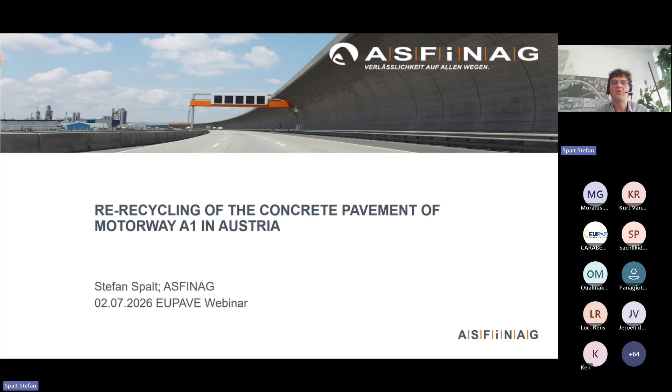Welcome from Austria to my presentation, the re-recycling of the concrete pavement of a motorway in Austria. First, I'd like to explain Asfinag, the company where I work. Asfinag is a state-owned company for operating, building and maintaining all motorways in Austria. The financing of Asfinag is 100% by toll, and in 2024 the toll amount was about 2.5 billion euro. In Austria all kinds of vehicles have to pay toll.

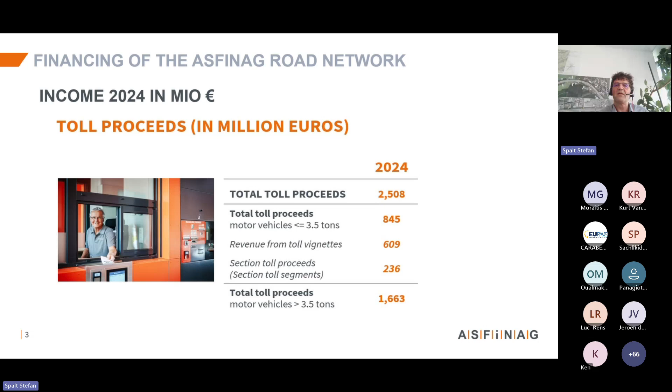That means, in the length of the road network, about 1.1 million euro per kilometer. In Germany, for example, in 2025, it was 1 million euro. What do we do with the money? We have a big construction program. The largest amount is for the renovation of roads. A little bit smaller are new roads and new lanes, the blue ones. And the smaller part is investment, meaning investments for lorries or for buildings.

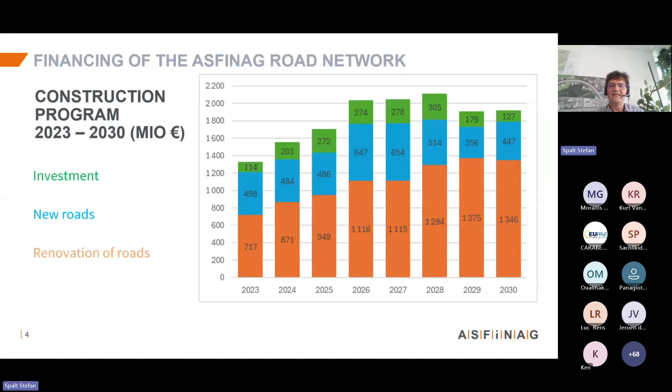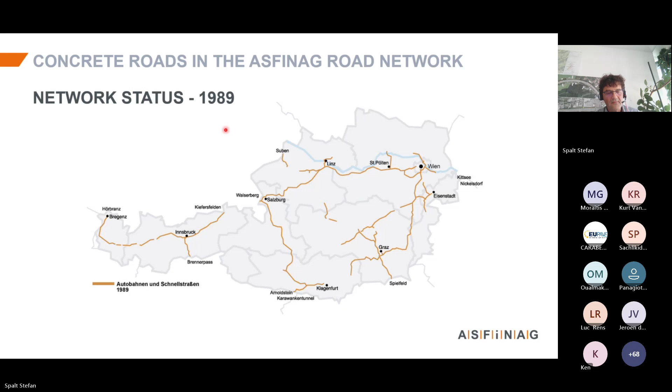And now we come to the network status 2024. Here you see Austria. The interesting thing for me: all roads built in the 50s and 60s were concrete roads. The gray ones are the concrete roads. These are different tunnels, because in Austria all tunnels longer than 1 kilometer have to be built with a concrete road. And here is a special one: we have one PPP project, S1, that's also a concrete road.

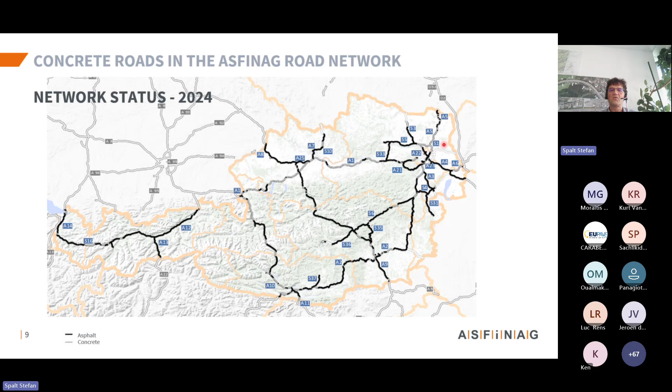For the renovation, you need about 400,000 cubic meters of concrete, or about 150,000 tons of cement. As I told you, in Austria we have 1/3 concrete roads, 2/3 asphalt roads. In Germany, for example, 25% of the total network is concrete roads.

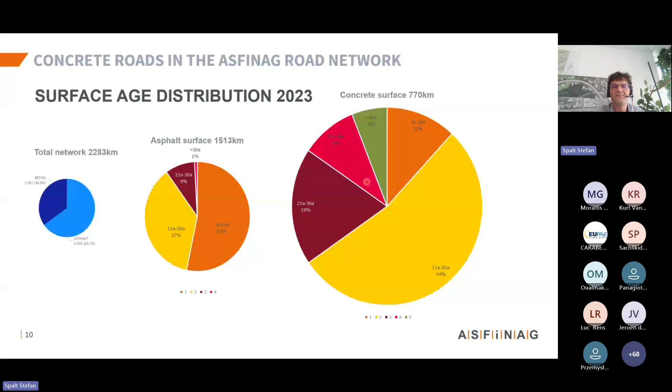Now we come to the first renovation cycle. The first renovation cycle started in 1990 in Salzburg. Why Salzburg? Because the construction in 1955 also started in Salzburg, so we had the oldest motorway there. The idea of recycling in 1990 was an idea by a company, and it was quite successful. Later this idea became the standard renovation of motorways. Also in 1990 at the same site, they made the first exposed aggregate concrete, and that's also the standard in Austria since 1990.

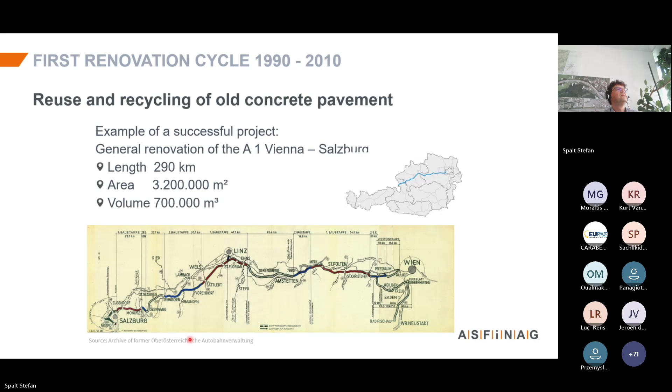So what was the motivation in the 90s for recycling? First one was to conserve natural resources, limited landfill space, and transport distances. And that is possible: you need the presence of homogeneous starting materials with properties proven over many years. Yeah, we know our concrete roads and we have the experience. But now I come to the most important thing, the economical, because in the 90s you could save about 10% of the money.

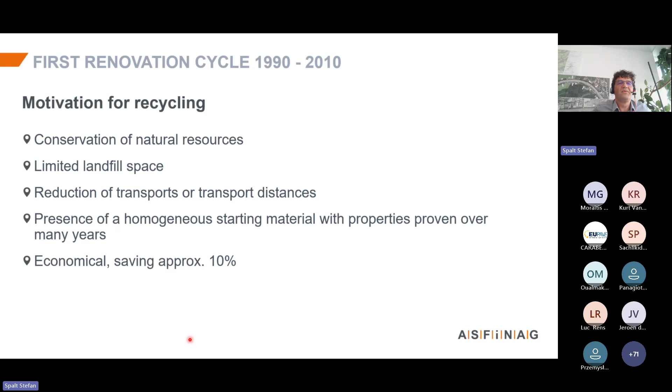Here we see a recycling area. The pictures are from 1996. At the left you see the two parts for the concrete production, one part for the top layer, one part for the recycling layer. And here on the right, there is the crushing plant. And you see this area is directly at the construction site.

So you have short transportation, and short transportation is important because for a good project, for good concrete roads, you have to bring the concrete just in time. If in the morning the machine is starting, the machine should only stop once a day in the evening.

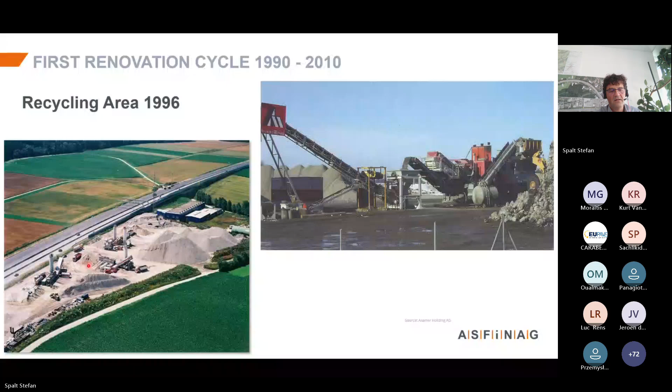On this picture you see how it was possible to recycle 100%. That's the old road. Actually, in the last years, they put a thin asphalt layer on top. Then all concrete parts: 70% was material 4 to 32, used in the recycling layer, and 30% was material 0-4 for the cement stabilization.

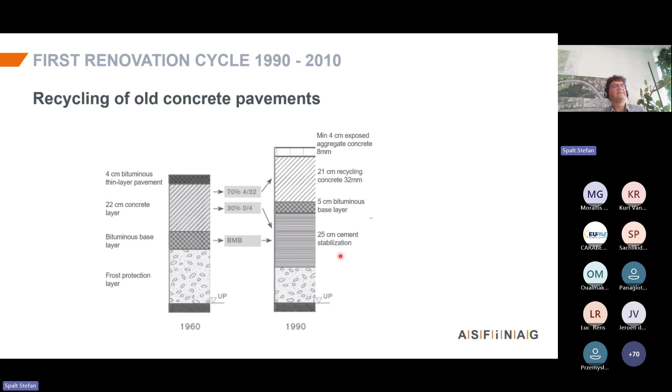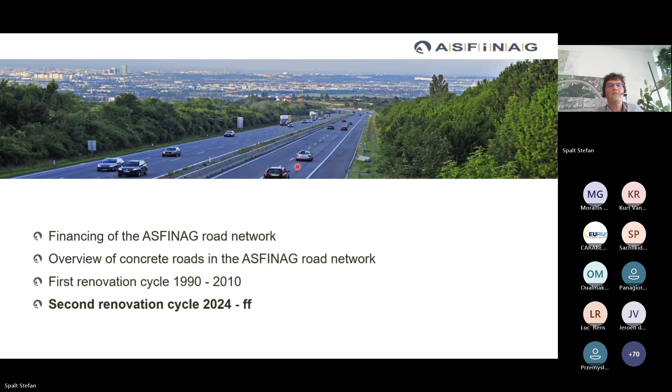Now we come to the second renovation cycle. What do you need for the second renovation cycle? The most important thing is you need a recycled roadway, of course. Without a recycled roadway, you can't re-recycle. And then you have to check the materials. The important thing is the preliminary investigation of ASR, the alkali-silica reaction. We checked in advance and it was okay.

And then in advance, we hired the land directly on the construction site and gave it to the construction company, and in this time we also checked in advance the official approval procedure. In our case, we didn't say you have to recycle, but it was possible to recycle because we hired this area in advance. And the company who won said he'd like to recycle. So we started the recycling process, they checked the recipe, and then we were working together.

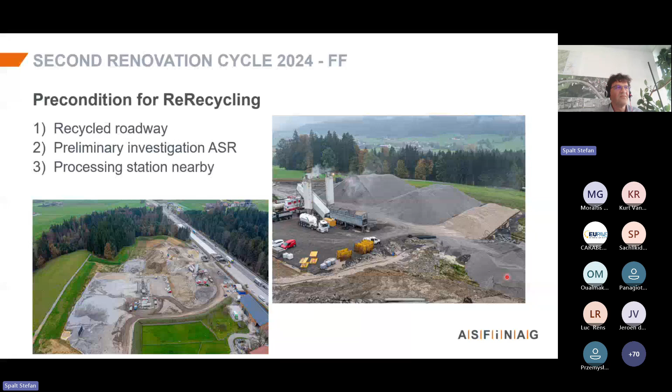So now let's see the EU taxonomy regulation. There are 5 points, and we checked together whether it is possible to reach these 5 points. The first point: you have to recycle all materials unless they're contaminated. That was very easy because that's daily business. Nobody would waste good materials. The second point, not so easy.

At least 50% of the new structural road elements must consist of reused or recycled materials or non-dangerous industrial byproducts. That means a part of the cement is a non-dangerous industrial byproduct. I'll explain later how we reached this by the recipe.

Then there is a limit on transport distance. That was no problem for us because the recycling area was directly at the site, as you saw. The new lifespan of the binder layer should be over 20 years for concrete roads. It's no problem because in Austria, concrete roads are designed for at least 30 years.

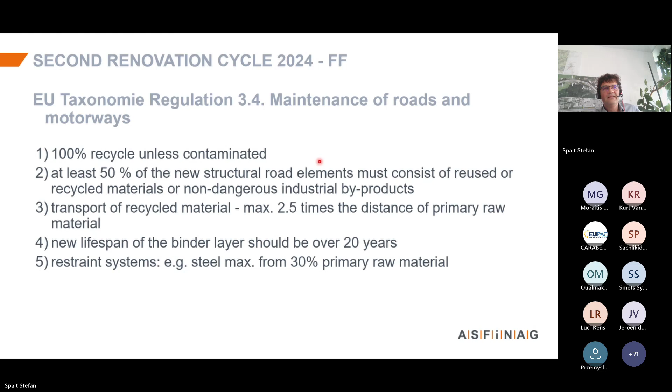Now we come to the recipe. The recycling is this part, the yellow part. And you see on the left the average of all recyclings on the A1 Westautobahn between 1991 and 2010. There we had a recycling rate of about 60%. In the first recycling at Mondsee Talgau, we had a rate of 55%.

And then, to design the recipe and say we'd like to reach the EU taxonomy, we know we need at least 70%. And now you say, oh, 70%, that's much more than 50%. Yes, but 50% means the top layer and the bottom layer, and you can only recycle the bottom layer. So the top layer is always new material.

And what did we change? You see the material 0/4. Only a part of the material 0/4 is for recycling. It's possible in Austria to recycle this material also. We asked the company, can you do it, can you manage, because it's very hard to get a smart mixture of concrete if you use these materials. And the company who mixed the concrete has more than 30 years of experience recycling concrete, and said, yes, we do it. We can manage.

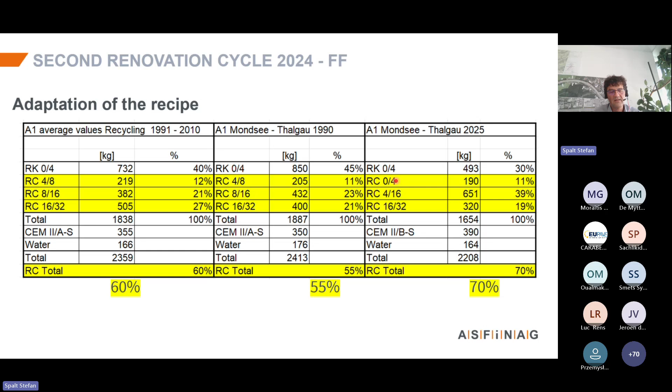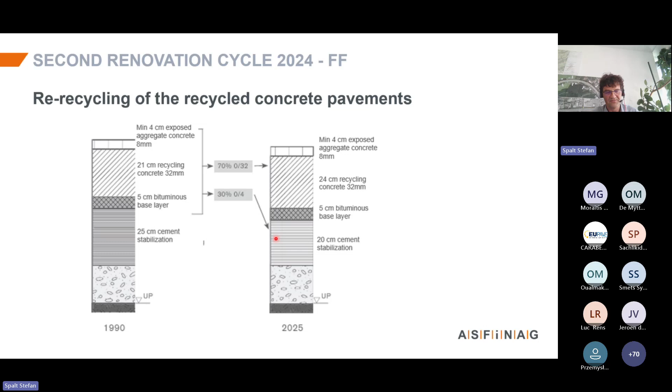Now, the conclusions. We are really proud of the first successful re-recycling. And I think that should be a blueprint for further renewals of concrete motorways in Austria, because now we have renovated 7.5 kilometers, but 280 kilometers are still missing. We showed that it is possible to build a motorway according to the EU taxonomy.

And I think the most important thing is number 3. There are the costs. We could save again about 10% of money for the concrete. And for the future, I think re-re-recycling should be possible. Yeah, that should be possible.

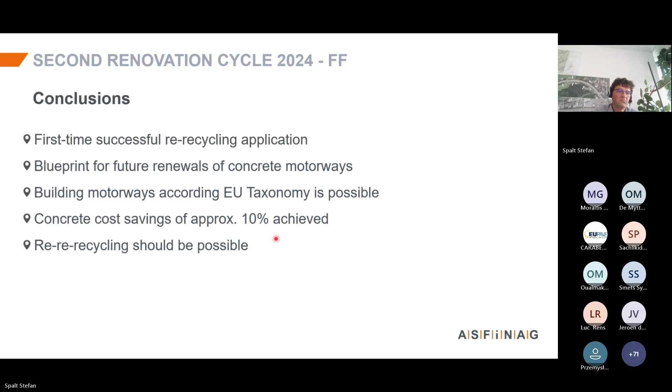So, first of all, thank you for your attention. At the end, we can enjoy a movie. And here you see the construction site. At the end, that is Lake Mondsee, and maybe in this area here is the village Mondsee. There is a famous church, and there they made the movie Sound of Music.

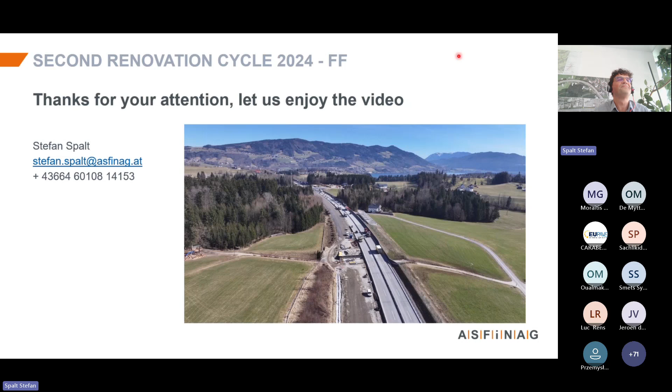So, I can't stop the presentation. The presentation is stopped. Yeah, thank you. No, I have to, just a moment, share again. And I start the movie.

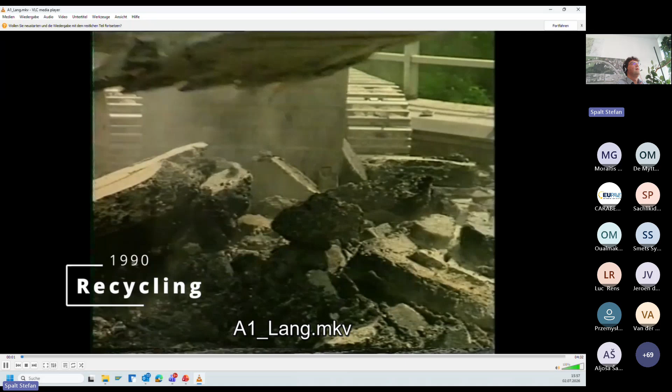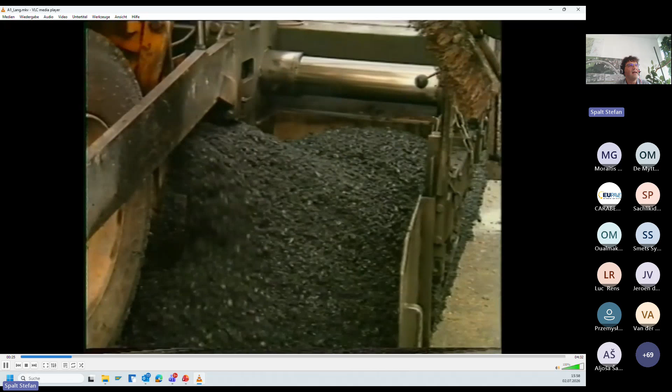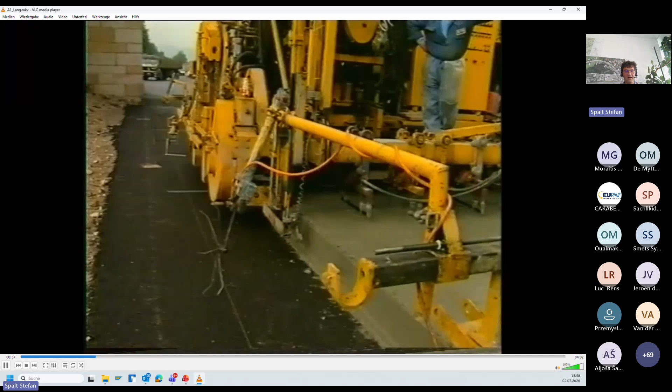Here you see 1990, they also made a movie for the first recycling. Here we see the recycling area and the crushing plant. Here the cement stabilization. And in Austria, we build 5 centimeters of asphalt on the bottom layer before we make the concrete road with the slipform paver with lower layer and top layer. The lower layer is the recycling layer.

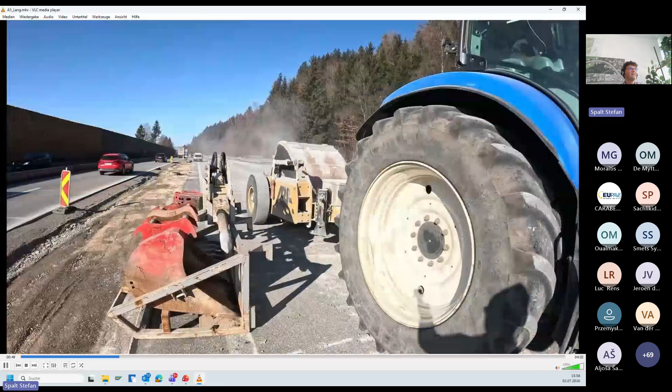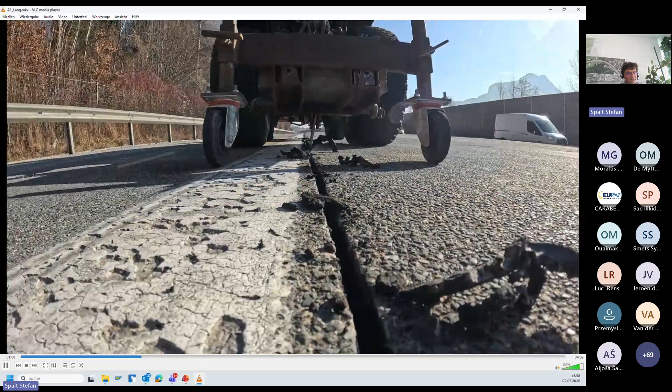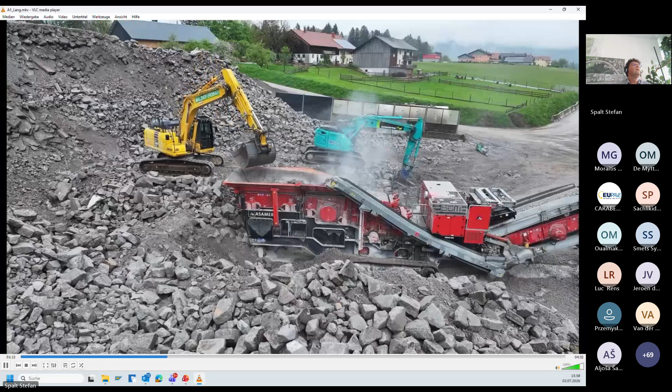Now we come to the re-recycling. We just did the same. First, you have to destroy the concrete. Then remove the seal, because we don't like the seal in the bottom layer. And you bring the material to the recycling area. Here we see the recycling area and the crushing plant. And here we produce 3 materials.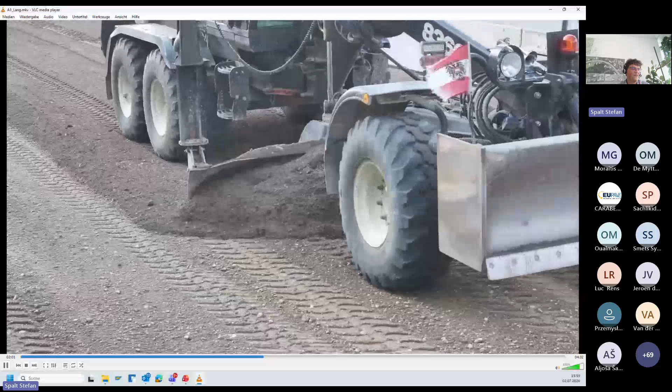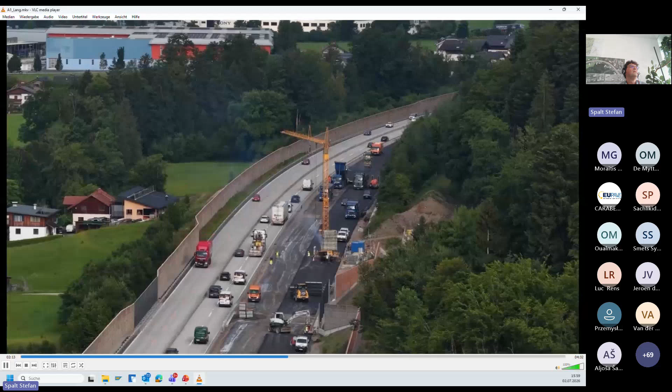Here we see the material, the most important, 16 to 32 millimeter. Then 0 to 4. That's this material. And 4/16. That's the material 0/4 for the concrete stabilization. Here you see the machine in action for the concrete stabilization. Then the bottom layer of asphalt, 5 centimeters of asphalt.

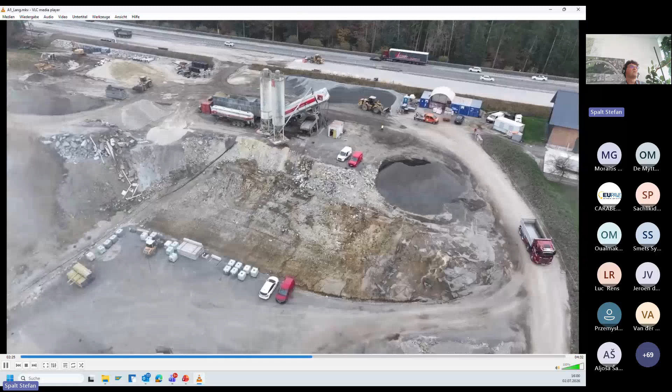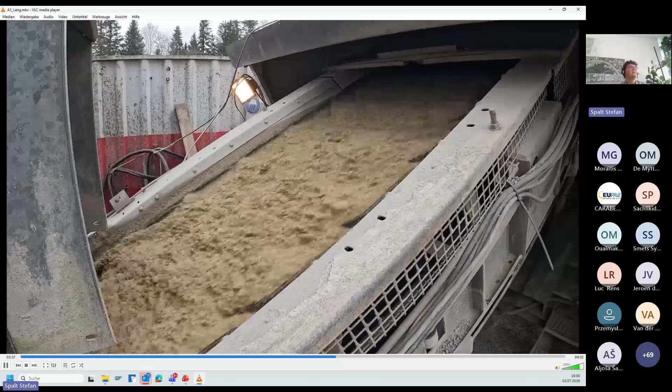And here is the production of the concrete. We also have 2 productions, one for the recycling layer and one for the top layer. Here we see the top layer. For the top layer you always have to use new material because it's important for the grip, because we use exposed concrete. That's the bottom layer, the recycled concrete.

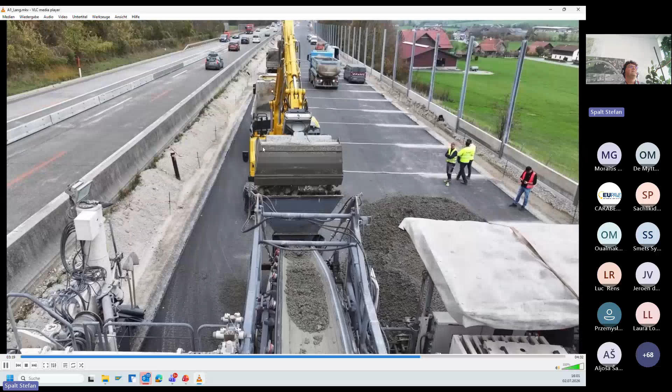And then they bring the concrete directly to the slipform paver. That's the recycling concrete. At the end you see the drain system. In Austria, we use a drain system. Yeah, that's the top layer on the recycling layer.

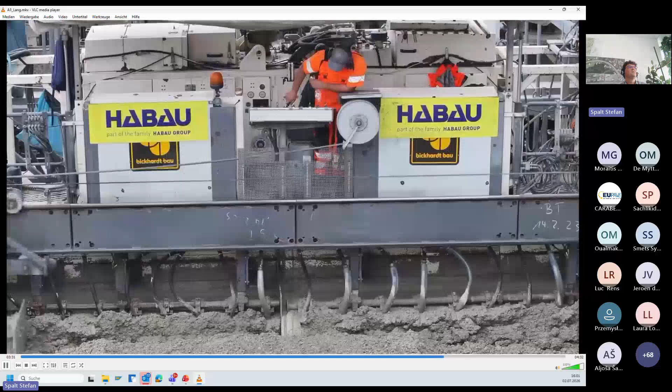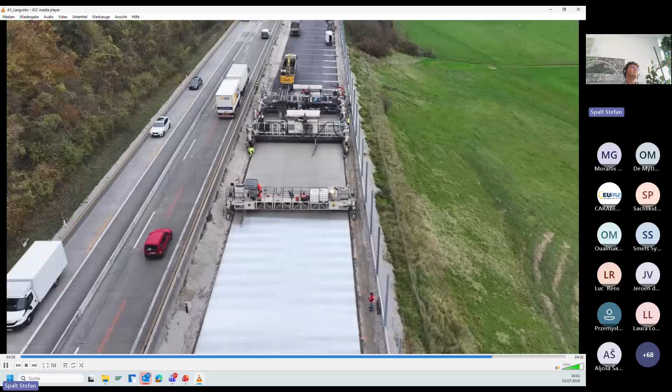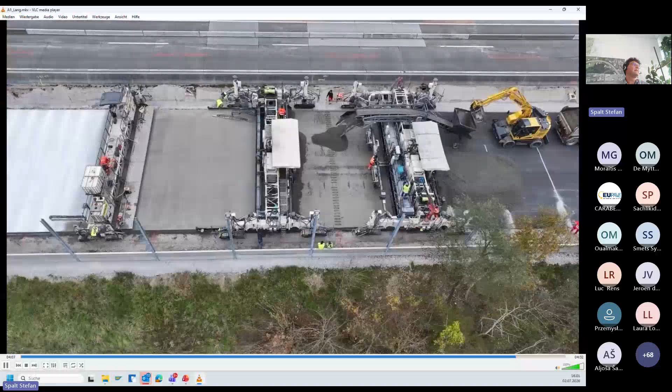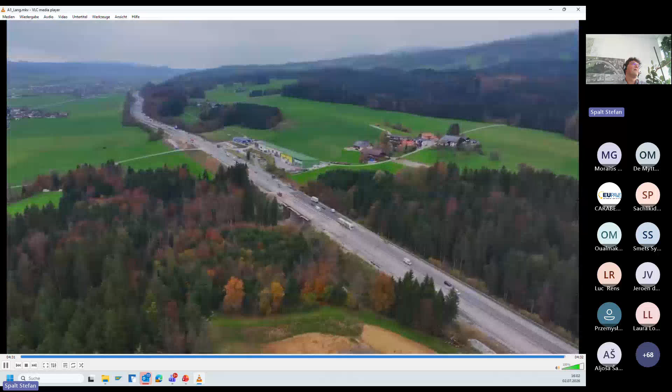Yeah, we use dowels, each 25 centimeters, which means 4 dowels per meter, and tie bars, 3 tie bars each. Yeah. And at the end, we see the texture curing machine, and we made exposed concrete on all lanes and grinding on the 2 lanes where there is traffic. And the grinding was only for evenness. And we could reach a wonderful evenness after the grinding.